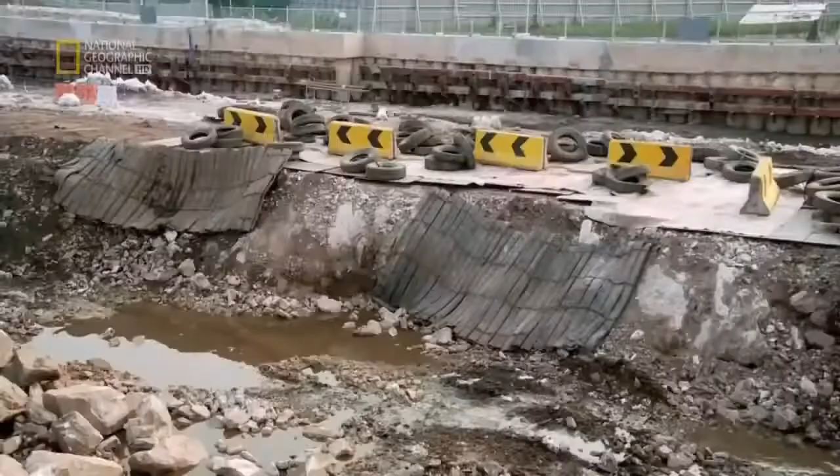Now there's an ambitious solution: a new transit system that will crisscross not only the city, but the entire region of Greater Kuala Lumpur. Huge machines will bore into Kuala Lumpur's treacherous bedrock to carve out almost 10 kilometers of tunnel. Every day of construction, engineers confront the perils of mechanical failure, fire, and collapse. Get it wrong and billions of dollars of investment could go to waste, and the streets of Kuala Lumpur and its pent-up economy will stay trapped in gridlock.

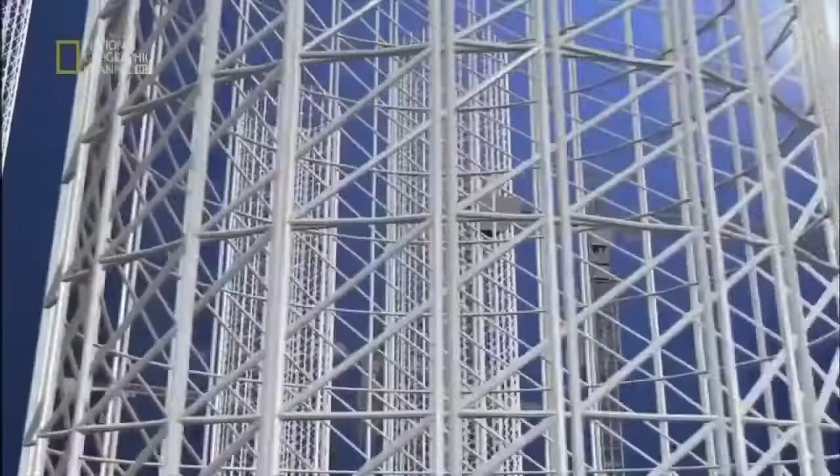Kuala Lumpur is one of Asia's most vibrant cities. It's looking to compete with the region's Asian tiger economies. Its magnificent skyline testifies to its soaring ambition. But at street level, it's a different story. The city is blighted by severe congestion that threatens its future growth.

Over 7 million people live and work in the Kuala Lumpur region, the Klang Valley. Every day, they head into town in 4 million cars. As an alternative, a light rail transit system was built. But over time, it has been overwhelmed, and connections are inadequate.

Now there's a solution: a new mass rapid transit system that will reduce the pressure on traffic and unite far-flung parts of the city. For any modern metropolis to be vibrant, to be competitive, to be on par with some of the leading cities in the world, you've got to have a modern public transport system.

The Klang Valley Mass Rapid Transit System, the KVMRT, is Kuala Lumpur's bid for greatness. Three different routes comprising more than 150 kilometers of brand new lines. It will be seamless travel around the Klang Valley, especially the areas of high concentration population.

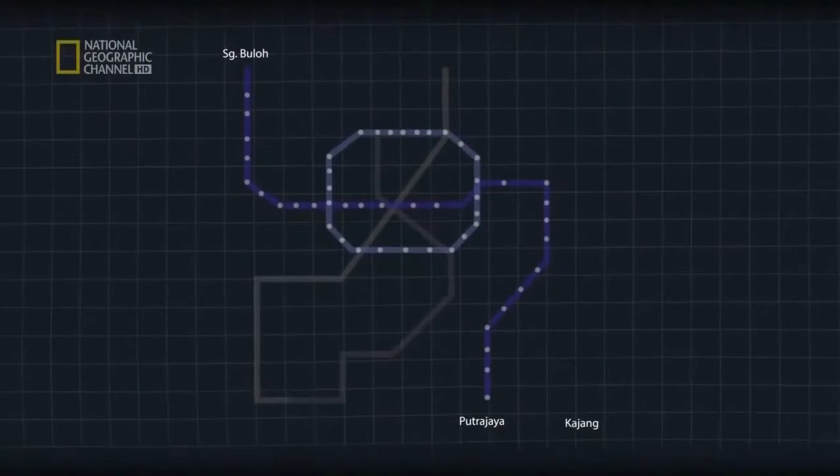The first stage of the plan is the biggest test of all. This is the Sungai Buloh Kajang line. It will stretch 51 kilometers with 31 new stations. A fifth of the new line will have to be constructed underground. To do this, 10 giant tunnel boring machines, or TBMs, will be brought to Kuala Lumpur and set to work.

These mighty engines do much more than burrow through rock, astonishing though that process is. As the huge drill crunches forward, the back end constructs the tough tunnel frame with high-strength concrete.

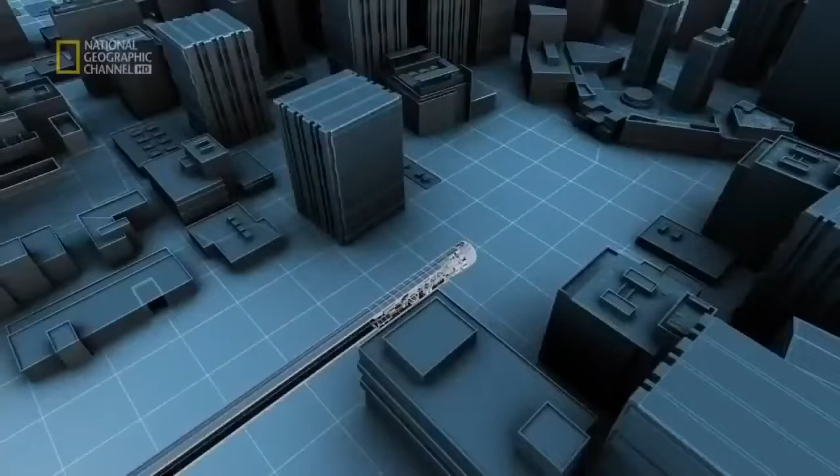In charge of this massive operation is engineering veteran Satpal Bogal. Most cities now, for railway mass transit systems, build tunnels using TBMs because of safety issues and because of ground conditions. The underground section of the new MRT will be a perilous undertaking.

For beneath Kuala Lumpur is a formidable engineering challenge. Below the city are two very different kinds of rock, and the TBMs will have to deal with both. The western area is known as Kenny Hill, and the eastern area as the Kuala Lumpur limestone. Imagine the difference between a Dutch Edam and a Swiss cheese riddled with holes.

Dr. Uilian Hock is the project geologist and expert on Kuala Lumpur's underground world. I got this Dutch Edam cheese here. As you can see, this whole piece of cheese is fairly homogeneous, very tight. And Kenny Hill, when it's bedded, looks something like this. This is like the KL limestone. All right, this is Swiss cheese.

As you can see, there are a lot of cavities and voids inside the cheese. These voids can be transmitted all the way to the other side of the cheese. Things can move in from one hole to another hole, and it may come in vertically and go out laterally.

The most formidable challenge lies beneath the eastern areas of Kuala Lumpur, which rest on a huge slab of limestone. Over millions of years, torrents of acidic rainwater have eaten away the layers of rock to sculpt a hidden landscape of pinnacles, cavities, interconnected passageways, and colossal caves.

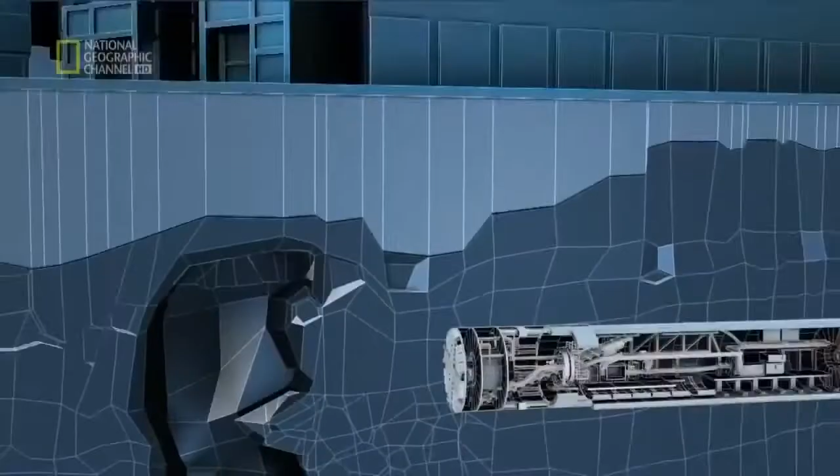Around me here on my left is a surface karst, or a limestone hill, you can say. Now imagine when we are underground and all these are covered with soil, it is totally a different ball game. So when you tunnel through this kind of material, there are a lot of unforeseen circumstances which would be a nightmare for tunneling. This is the worst nightmare of all.

The drill head hits weak cavities and the rock caves in on the cutter head. The solution is this stuff: slurry. At the head of the drill is a high-pressure chamber that injects a liquid called bentonite slurry into the cavities before they can collapse.

This ingenious system was used by the engineers who built the Smart Tunnel in Kuala Lumpur, the world's first combined storm and traffic tunnel. But builders learned some hard lessons about slurry.

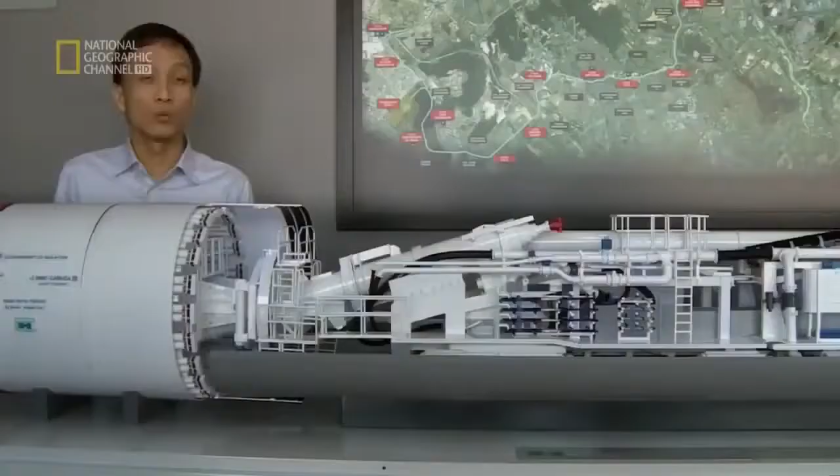Ng Hawei was a rookie engineer on this project. We have the best machines in the world in the SMART project, but we still do have some problems. We just couldn't control the slurry and it easily escapes to the surface, creating sinkholes.

What Ng and the engineering team found, to their cost, was that the slurry they injected into the limestone cavities could escape into surrounding rocks and cause havoc, bursting from the ground like a geyser or creating sinkholes at the surface that might suck in people, cars, or buildings.

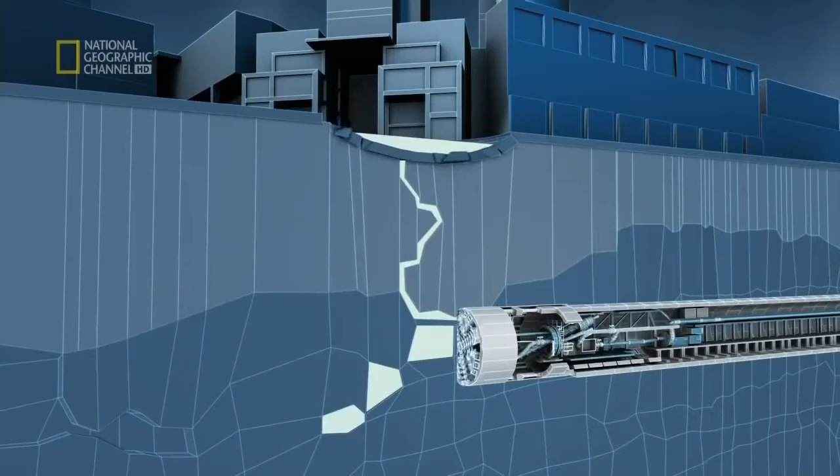Today, Ng heads the tunnel team building Kuala Lumpur's MRT system. And this time, he had to find a solution to the uncontrollable slurry problem.

Working with German company Herrenknecht, Ng and the team of engineers have come up with a revolutionary kind of machine. We throw in all the ideas, we have brainstorming sessions, we consult a lot of experts, we have to do a lot of research because no machine has been designed like this before.

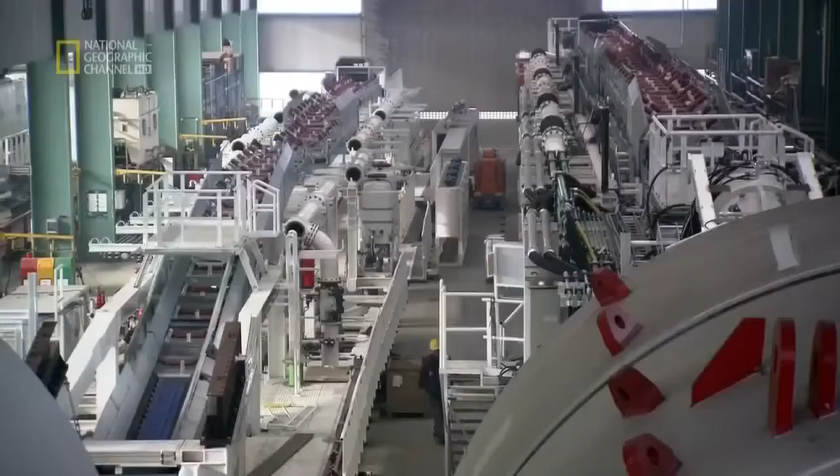From these brainstorming sessions was born this mighty machine. Called the Variable Density Machine, it's the state-of-the-art tunneler. For the first time, a TBM can control the consistency of the slurry and take on whatever Kuala Lumpur's underground throws at it. Even the construction of this revolutionary machine is on an epic scale.

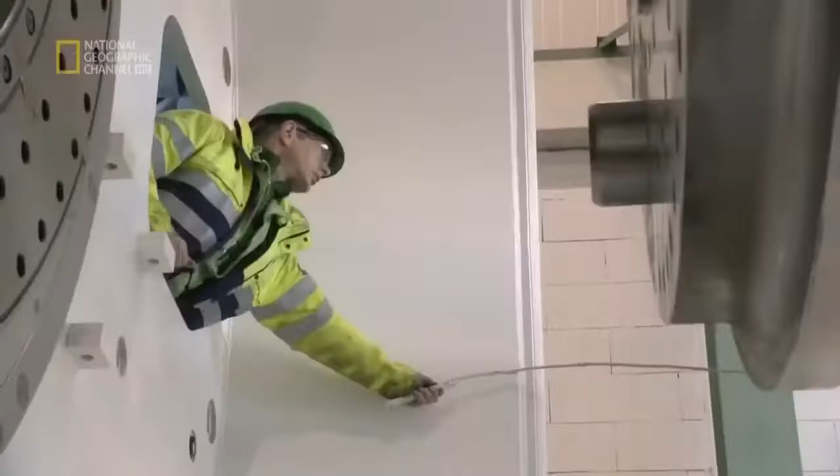Components are brought from all over Europe to be assembled inside the massive factory in Schwanau, Germany, and other Herrenknecht plants in China. You can say the machine is fitted together with about 40,000 pieces, one by one.

The design starts screw by screw, piece by piece, and this is brought together with all our 400 engineers. They do all these works to come to this level, what you can see today. It takes 9 months to manufacture the revolutionary TBM.

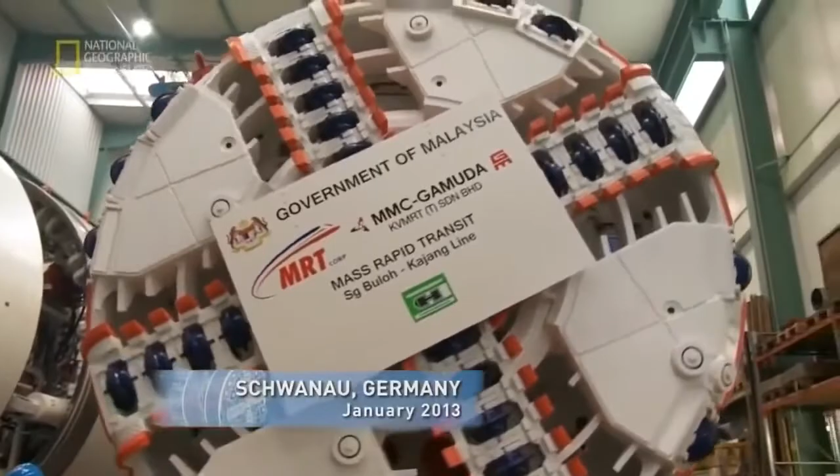Today, it's ready to be put through its paces. We have only seen it on the drawing board so far. So this is the first time that it is all put together. Everything is running, so we can check every equipment, including the cutter heads, the hydraulics, the safety features. This is the last chance for us to make final modifications before we send it to the site and put it in the ground.

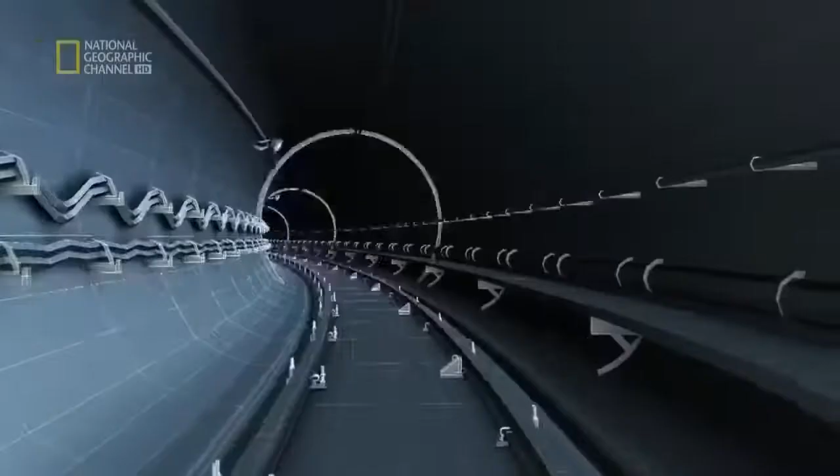As the engineers work on the TBMs in Germany, work gets underway in Kuala Lumpur. The engineering company in charge of tunneling, MMC Gamuda KVMRT, must complete the job in 24 months and with minimum disruption to the city above.

The operation is conceived on a military scale and with military precision. The TBMs will be launched from 4 different staging zones along the planned route of the underground section of the MRT. At the western end of the tunnel, the elevated section of the MRT begins its descent underground from the surface. But at the 3 other zones, shafts must be excavated so that the different TBMs can be put to work beneath the city. Eventually, the different sections of the 9.5-kilometer tunnel must all link together.

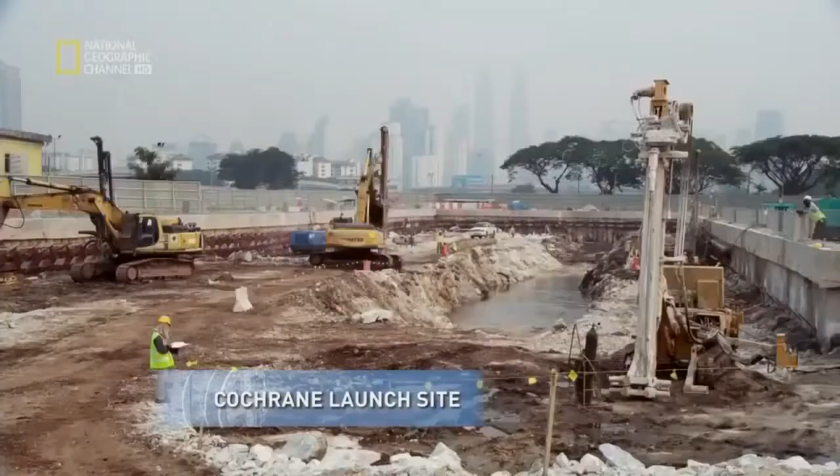Since July 2011, work on Kuala Lumpur's new MRT starts here at the Cochrane site. It must be dug out to a depth of 30 meters before 4 TBMs can be deployed. The huge staging zones will be blasted out of the ground.

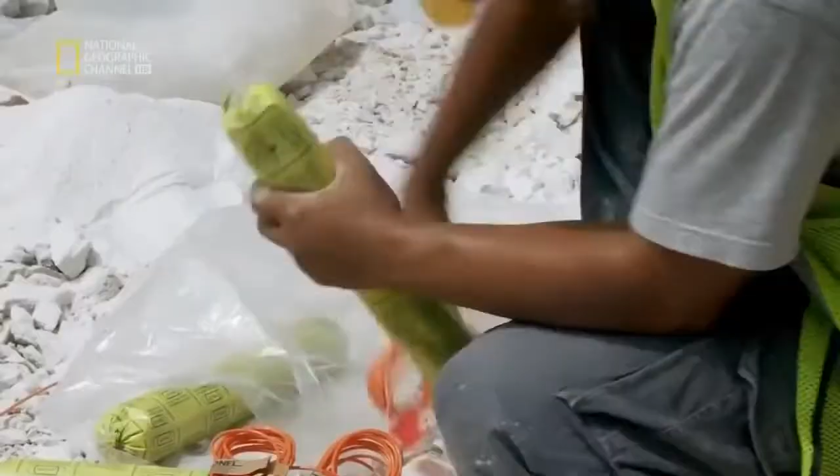We have short time to meet our requirements, so we are working with frequent blasts, more than 2 or 3 blasts a day. The blasting must be carried out with rigorous precision, especially in a city as dense as Kuala Lumpur. So when you talk about blasting itself, it's dangerous.

You can see we've been surrounded by high-rise buildings. Now at the moment you're using about 150 to 200 kg, so that can bring a 10-story building down. The solution is to sequence each blast, creating a pressure wave that in theory won't damage surrounding buildings.

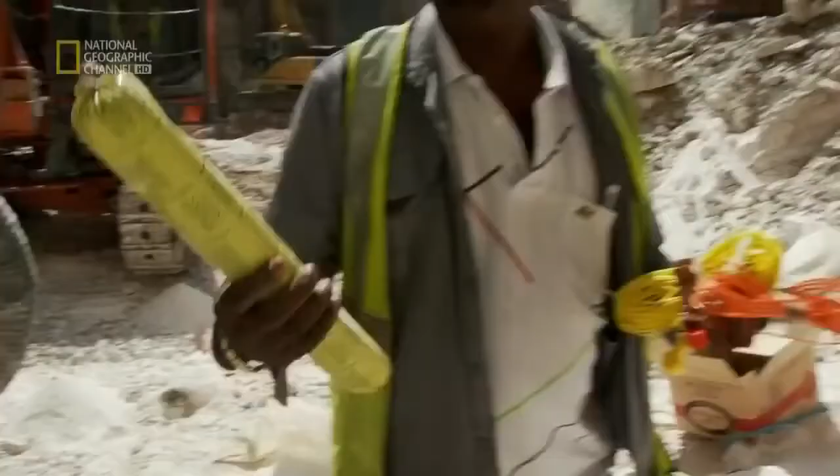These are the basic things we use. My hand now is explosive, which will be charged to the detonators over here, and it will be connected one at a time, and finally we have delays. This will segregate the blasting rather than at one go.

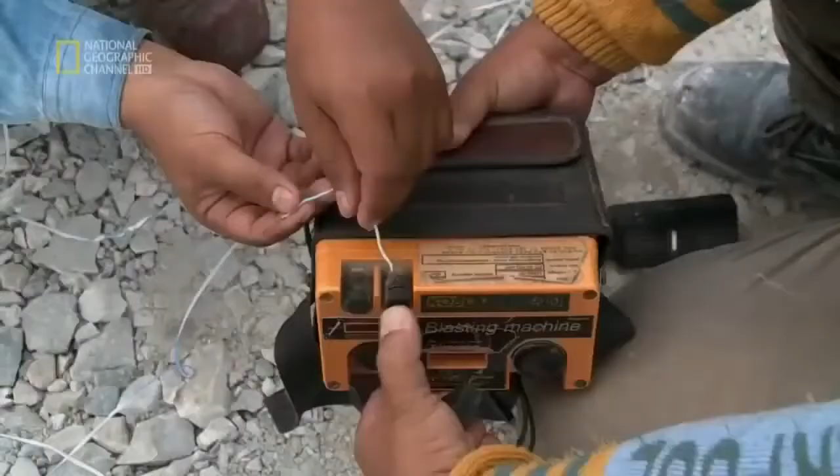Engineers dig rows of holes between 3 to 6 meters deep. Then the explosive charge is inserted inside with a detonator. These are connected to a central command point. But nothing is left to chance. Giant barriers of steel plates, truck tires, and concrete prevent debris flying from the site. The charge is set.

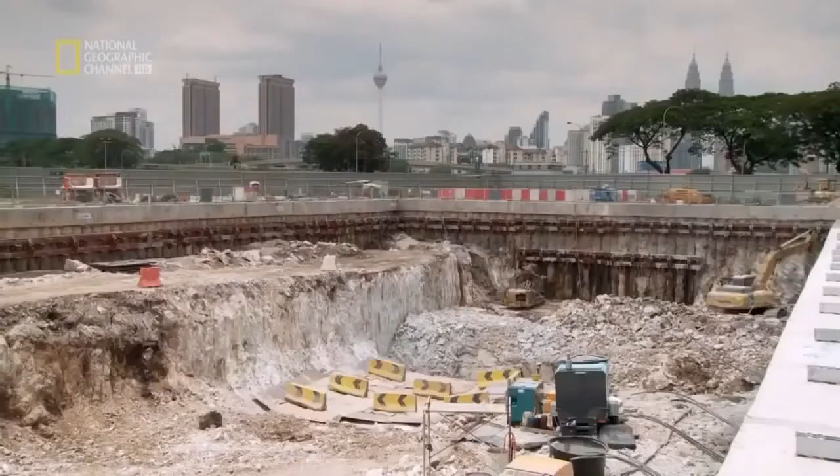The engineers have got the right formula, and the surrounding buildings are safe. The blasting continues at the Cochrane site for seven explosive months. Enough rock and soil to fill 50 Olympic-sized swimming pools is blown out of the ground.

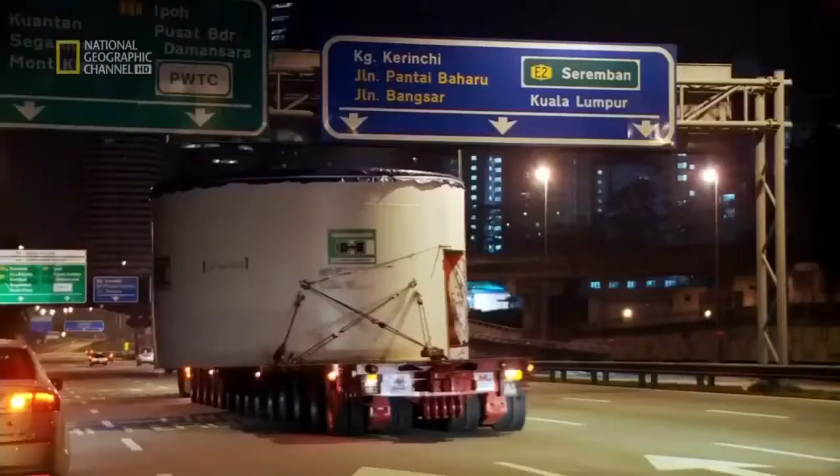Finally, the site is ready to receive the first TBM, code name 774. At the beginning of 2013, the first new model arrives in Kuala Lumpur. The giant machine is transported in parts to the Cochrane site on huge lorries.

But that's the simple part. Now the 160-ton monster must be lowered into the excavated shaft so that they can start chewing into bedrock. To lift it 30 meters down the shaft, we have to be very careful. Anything can go wrong and then we are stuck. It will push back the whole project completion by a lot.

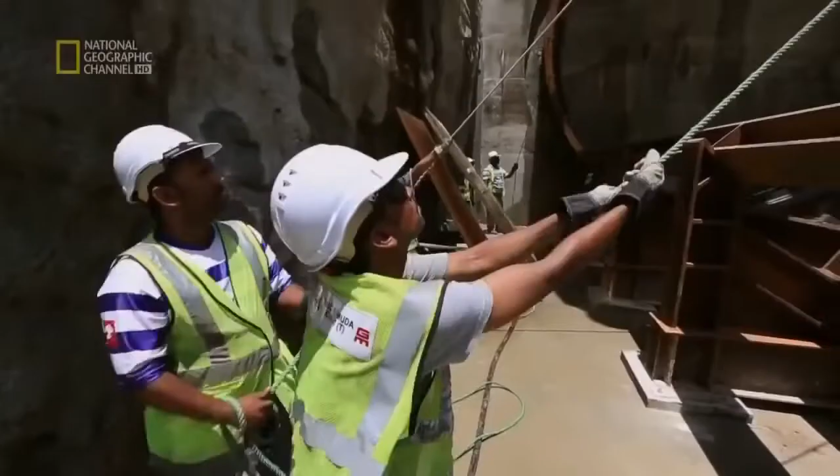At the site, everyone is holding their breath as the TBM begins its descent underground. Malaysia's capital, Kuala Lumpur, is being transformed into a huge building site. A new MRT system is under construction. Close to 10 kilometers will be built beneath the city, and a revolutionary new tunnel boring machine, or TBM, is

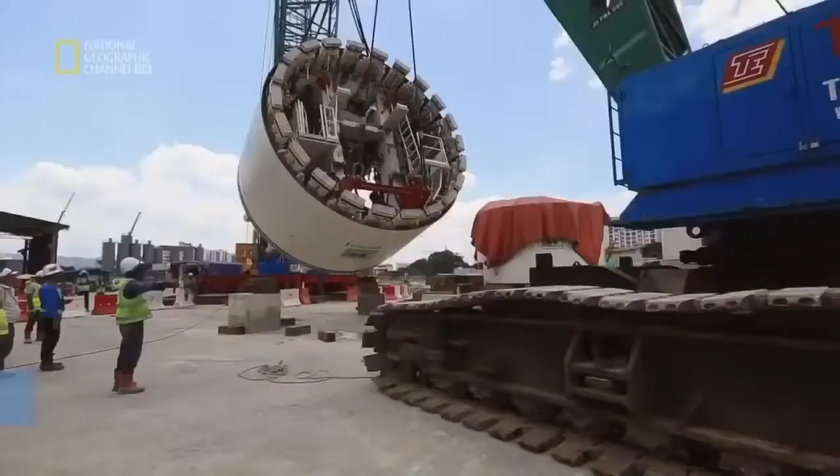brought from Germany. The first to be sent into action weighs 160 tons and has to be delicately lowered 30 meters to the tunnel entrance.

The man in charge of the tunnel operation is Ng Hao Wei. He won his spurs building Kuala Lumpur's famous Smart Tunnel. We are dealing with very delicate components. We cannot afford to damage it. If the extent of damage is huge, then the impact to the project will be tremendous.

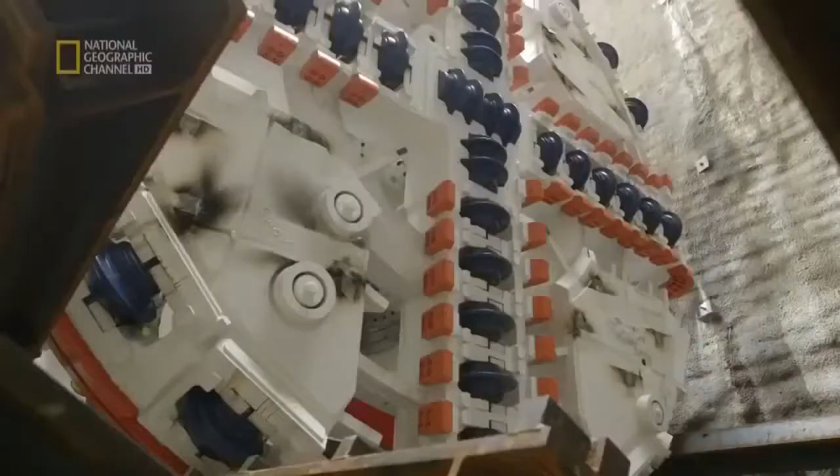This is literally the cutting edge, the business end of the huge machine. The circular cutter head weighs 70 tons with 37 tungsten carbide cutting discs, which are stiffer than steel and denser than titanium. The entire TBM is 135 meters long, almost double the length of a 747 jet airliner.

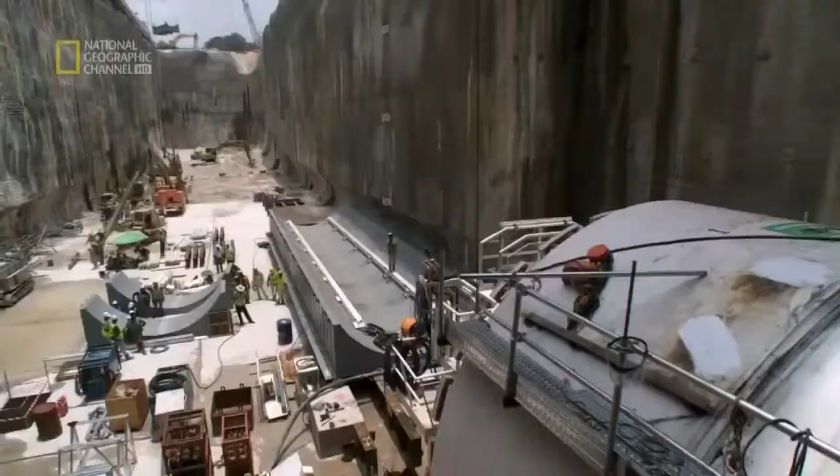Each TBM has 10 interconnected gantries to support the operation. Only three-quarters of the shaft has so far been excavated, so the monster machine has to be assembled in sections. We assemble up to the 6th gantry, which will give us the key components of hydraulics and electrics, so we can start to launch the machine, at the same time give sufficient space for the shaft excavation to go on. It takes just under 3 months for the TBM to be assembled.

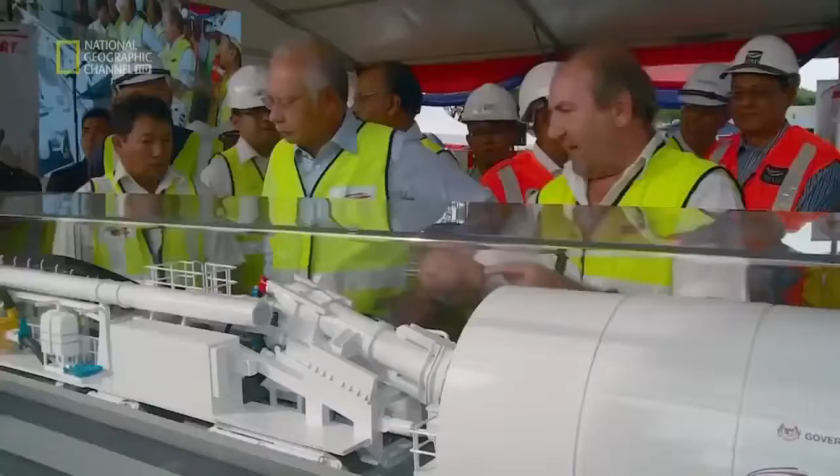The Prime Minister of Malaysia launches the very first variable density TBM. It's actually a technological marvel. And it goes to show that, in partnership with a German company, Malaysians can offer a lot of our technical guidance and advice. This is something that we can be really proud of.

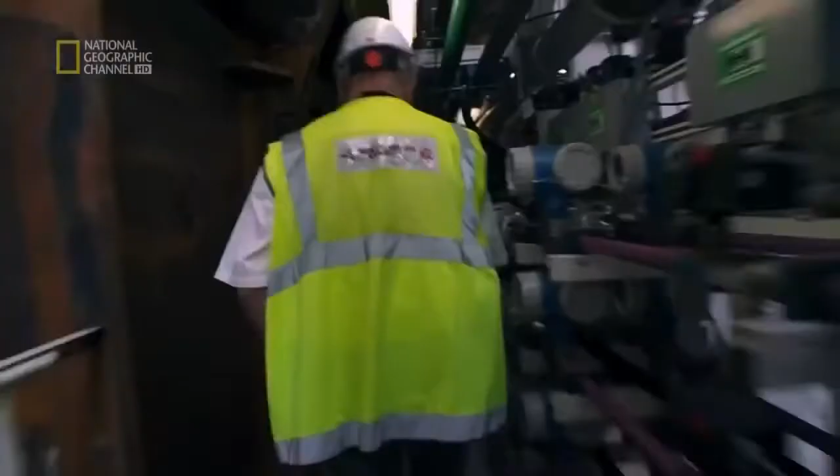One day later, Ng Hao Wei and his mentor Gustav Klados arrive to check on the machine's progress. Gus, a veteran Hungarian tunneler, has worked on some of the biggest tunneling projects in the world, including the Channel Tunnel linking Britain and France, and the Smart Tunnel here in Kuala Lumpur. This tunnel warrior is the team's project manager and is thrilled to be working back in the city on the new machine.

It's uncharted territory. We are trying out something totally new. A lot of people at the beginning said no, it won't work, but now it is excavating. You can hear the stones moving around in the pipe, so it's a fantastic noise. It's my favorite, much better than in the office.

It's not just the machines that will need breaking in. The giant TBMs must be served by an army of workers, day and night, week after week, month after month.

I'm new here, but I try to make my best every day. Everybody starts as new, trust me. I did start as a new guy too. My first job was to go and count the number of nails and bolts and nuts in the stores. I went there and literally counted them for a week. When I finished, I went to the storekeeper and he told me that we usually use a scale.

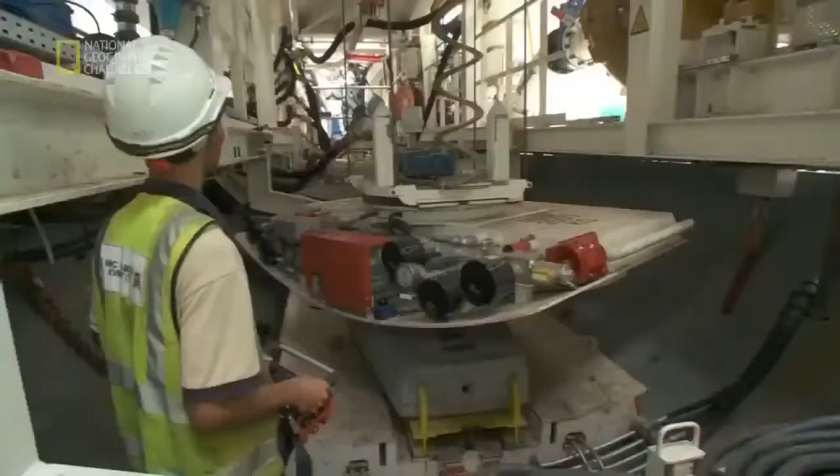The MRT tunneling project will need thousands of workers over the two-year period of construction, and MMC Gamuda set up an academy to train the hundreds of workers needed to finish the tunnel on time.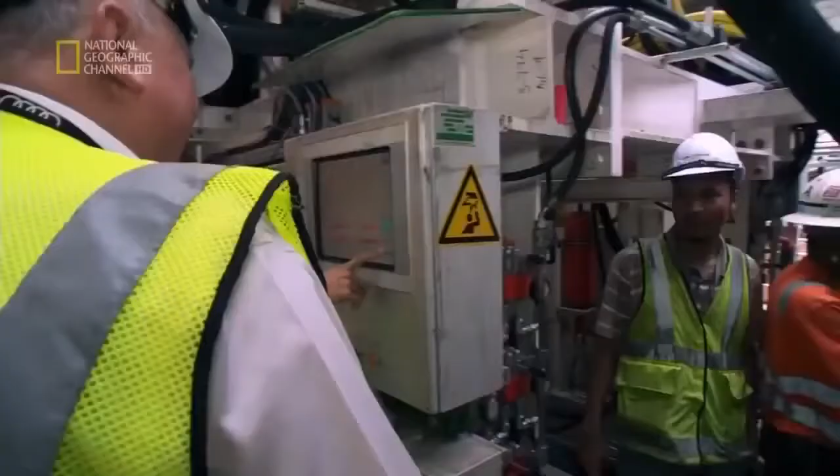Veteran or newcomer, the team faces a daily avalanche of problems, and right now, the problem is pretty basic. The TBM is just not picking up speed. 8 millimeters a minute, not very fast. Yeah, but it's all right.

At this pace of tunneling, the project will take 4 years longer than expected and run millions of dollars over budget.

But veteran engineer Gus Klados hopes that the giant machine will soon pick up speed. In the next few months, it is just to sort of break in the machine like a horse which has never been ridden before. And I am convinced that we will make it work.

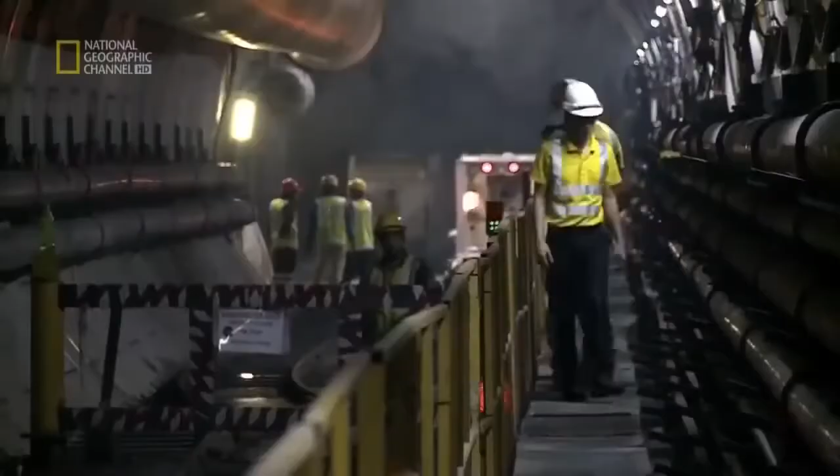The team is under pressure to complete the tunneling works on time. In the tunnels, the TBMs never stop mining. It's a 24-hour operation. And 3 weeks since mining began, the giant machine has at last picked up speed.

The TBM is like a huge underground factory, drilling, building, and spewing out waste. The heart of the entire operation is in this tiny space.

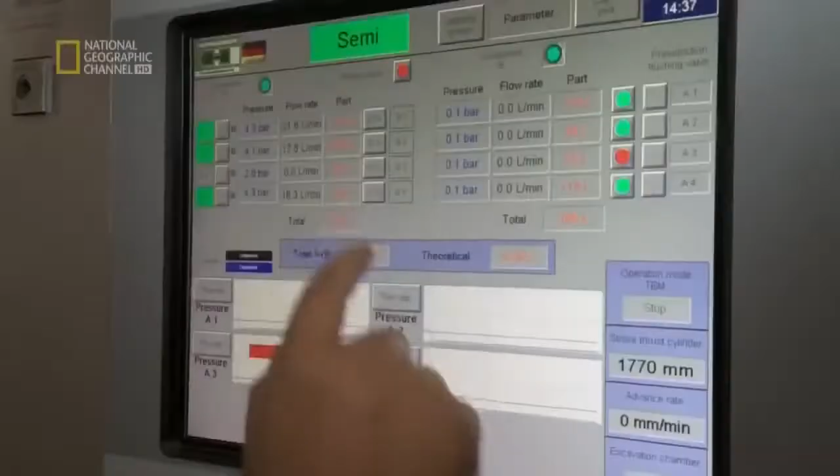So what's happening? Pressure sensor number 4 has a broken wire. Control cabin means the heart, the control center of the TBM where everything is controlled.

If you're building a skyscraper, visibility is not normally a problem. But underground, it's a different story. You can't see through rock. So to give the TBM underground eyes, the machine is equipped with arrays of sophisticated sensors. It's like when you are working in a submarine. You have to depend on the sensors, you have to depend on communications, you have to depend on eyes. Other than yourself, you can't see anything.

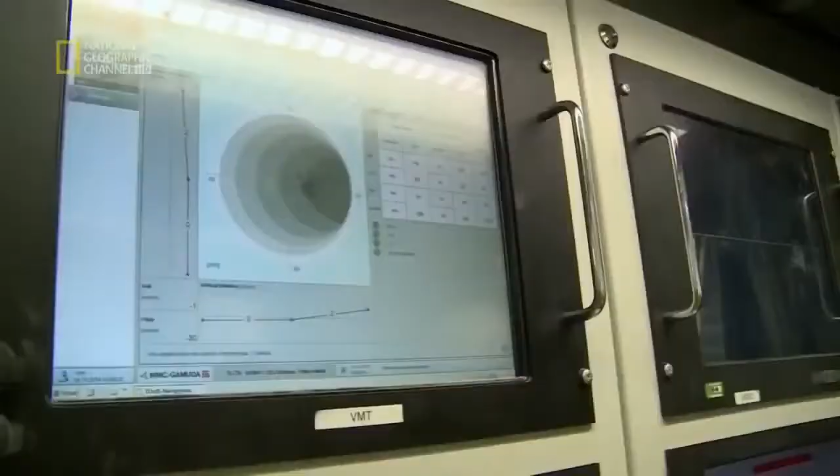Inside the control cabin, engineers can work out with absolute precision the real-time position of the TBM, calculate changes of direction, and when to start lining the tunnel wall. After mining about 1.4 meters, we build the segments piece by piece and then build them up like a jigsaw puzzle. These tunnel rings are made from 7 segments plus 1 keystone that holds everything together.

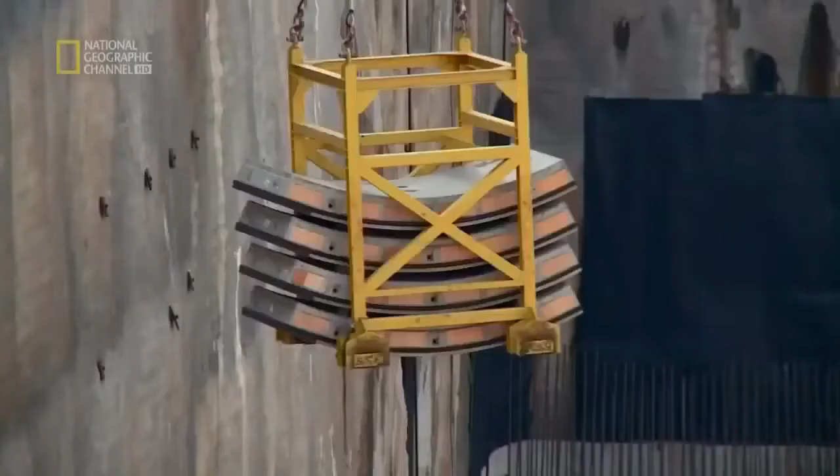The concrete wall segments can withstand extreme pressure 30 meters underground. All day long, concrete segments arrive at the TBM. Each segment weighs 2.2 metric tons.

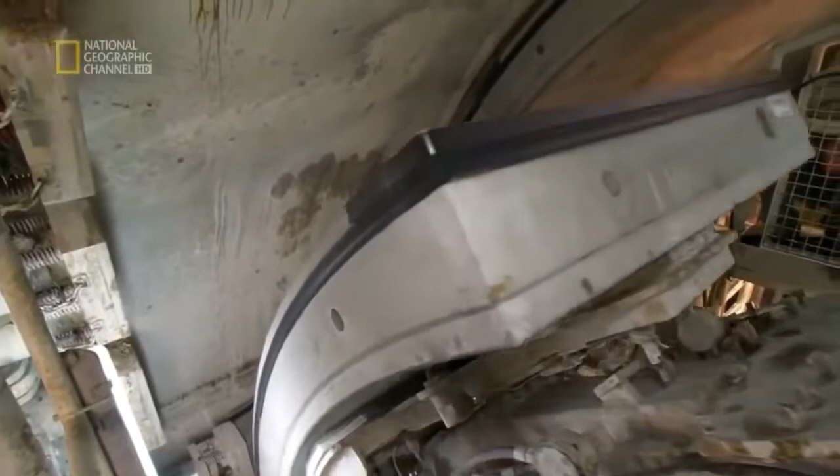Giant hydraulic arms swing the segments into place using the TBM's vacuum erector, which uses the power of suction to raise and position each segment. Precision is essential. If any one of these segments are wrongly positioned, the consequences would be catastrophic.

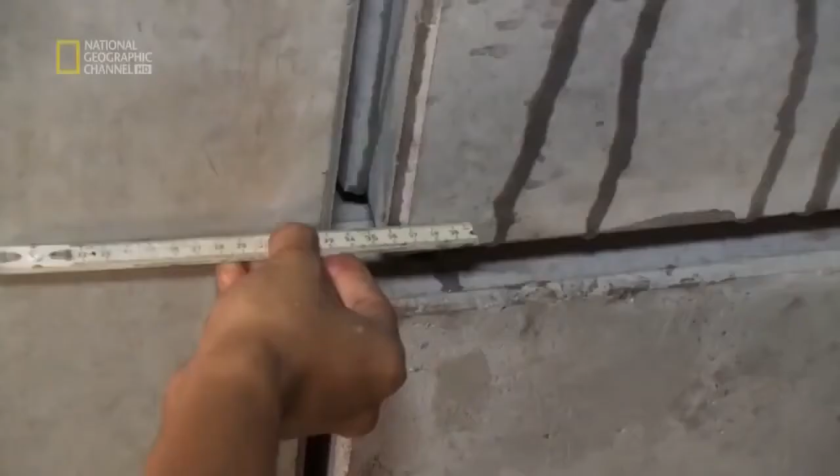So it's very important to drum into the ring building team that they have to build it to the required tolerance of a few millimeters precision. If we are out from tolerance, the water will find its way to seep through and we'll have a great problem to seal it up.

Over time, as graduates of the Tunnel Training Academy get more experience, the process builds up momentum. In the first week, the teams managed to place just 3 rings a day. 3 months in, and the rate is 5 times higher.

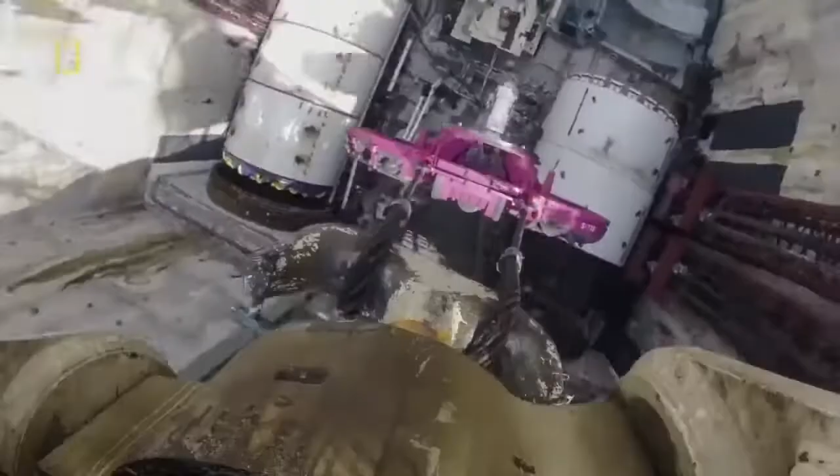The campaign to excavate Kuala Lumpur's new MRT tunnels is about to enter a more intense phase. By November 2013, 4 TBMs have been successfully launched from the Cochrane site. But at another launch site near Inai Road, the engineers have run into difficulties.

Here, 2 circular shafts are being excavated to 30 and 45 meters in depth. But as the shafts are blasted out of the ground, disaster strikes.

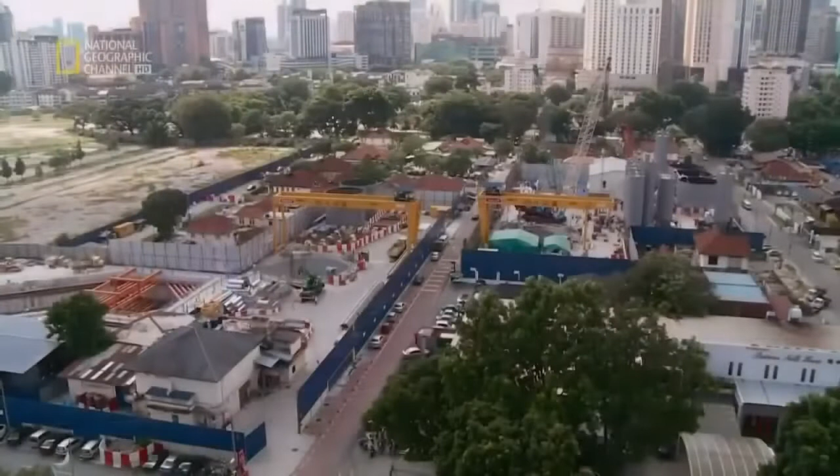The hole in the garden is frightening enough, but the condition of Mr. Jamal's home is even more alarming. Floors dip and cracks ripple up walls and across ceilings. The family home is falling apart.

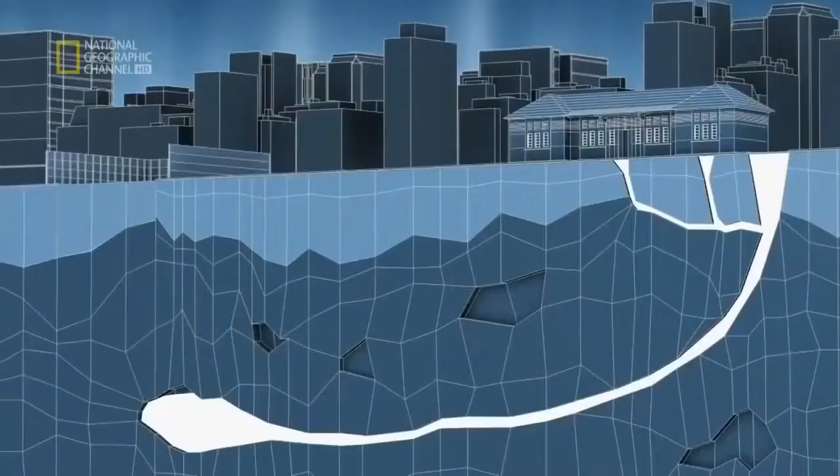In limestone, what happens is that the solution features can be connected laterally and vertically. What happened is we drill a shaft, and this hits a connection. When there's a hole, it's like a pipe culvert. If you have a culvert connecting from the shaft to underneath Mr. Jamal's house, that forms a very easy flow passage of water, bringing the soil from underneath Jamal's house into the shaft. And that results in sinkholes.

And it's not only Mr. Jamal's house that's in danger. Water is pouring in from the walls in the deeper of the 2 Inai shafts.

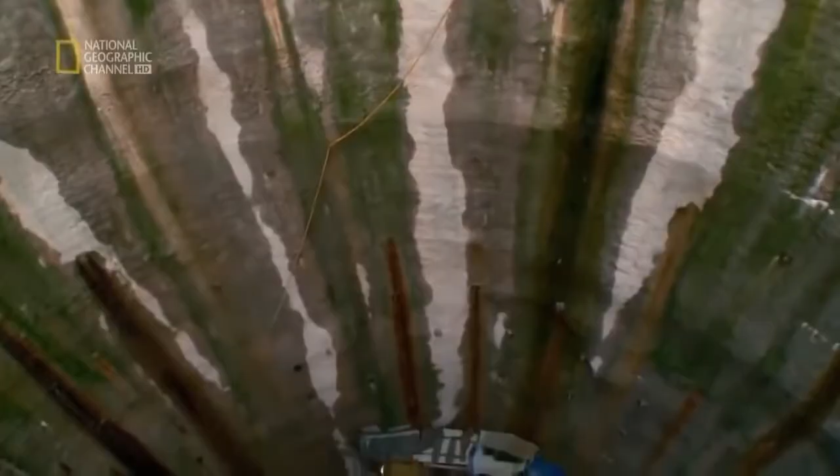It's unstoppable, and the situation is a tough call for project director Satpal Bogal. We couldn't stem it, and the decision was taken to backfill it for safety. That decision then followed on to other changes to the program.

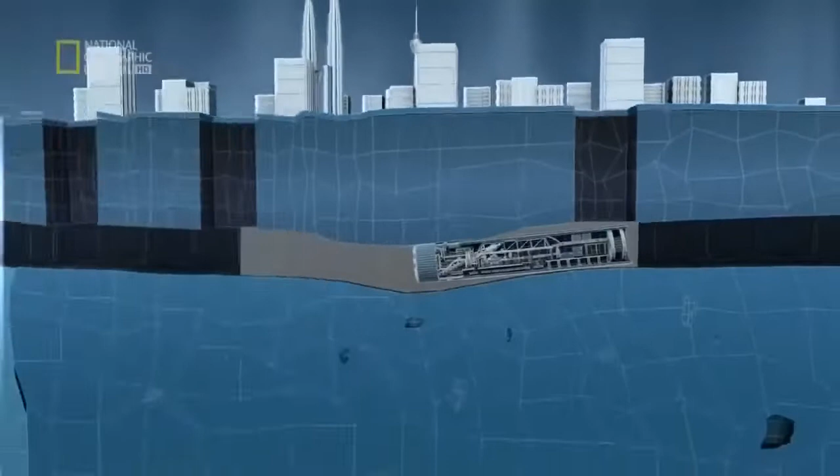Abandoning one of the two Inai shafts is a huge setback. Now only one TBM can be launched from here, meaning a new strategy has to be devised. The first TBM brought to Malaysia, 774, which has been mining from the Cochrane site, must now make up the difference and tunnel more than twice the distance. It will put the complex machine under severe strain.

It's not only flooding that makes the Inai launch site such a headache for the engineers, it's a very tight fit compared to the other launch sites. Tunnel engineer Aslan Marzuki is in charge of getting the huge TBM to the bottom of the shaft. It's a smaller shaft, it's not a square, it's a circle. That saves space, but that means our launching is going to be staggered.

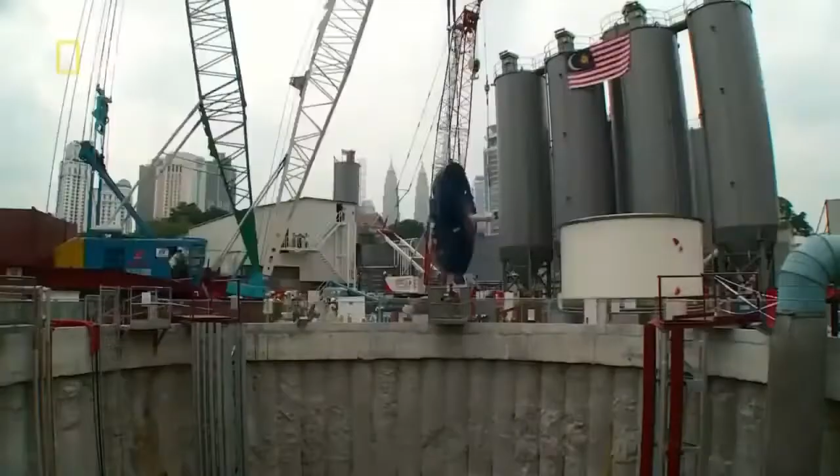The team will blast out tunnels on both sides of the shaft. Then the front section of the TBM is inserted. Next, three out of the ten gantries will be lowered one by one, followed by the giant screw. The problem is that the 18-meter screw segment is longer than the width of the shaft.

Behind me, this is our biggest component that's going to be lowered down. It's the most difficult one because this length is actually bigger than the shaft itself. The solution is simple, but risky.

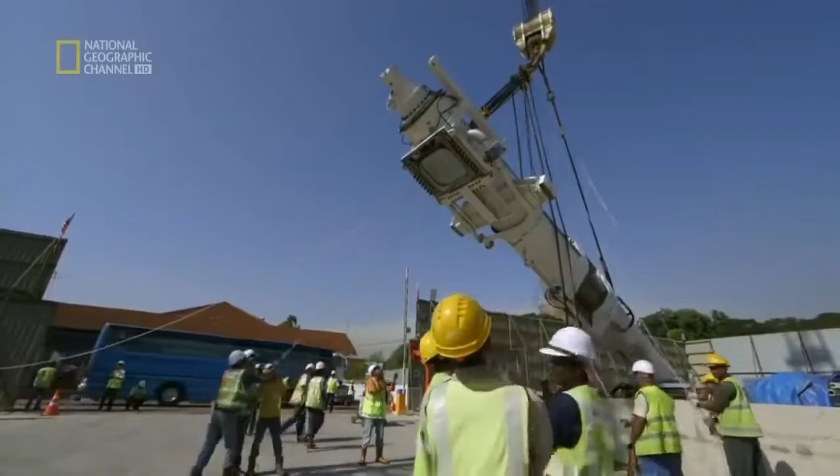The screw segment of the TBM will have to be lowered into the shaft at an angle. We have to tilt the screw conveyor at a 56 degree angle. You have to use a chain block, a hand winch, to pull the machine upwards. It sounds simple, but that giant screw weighs a whopping 15 tons, and any deviation from that critical angle would be catastrophic.

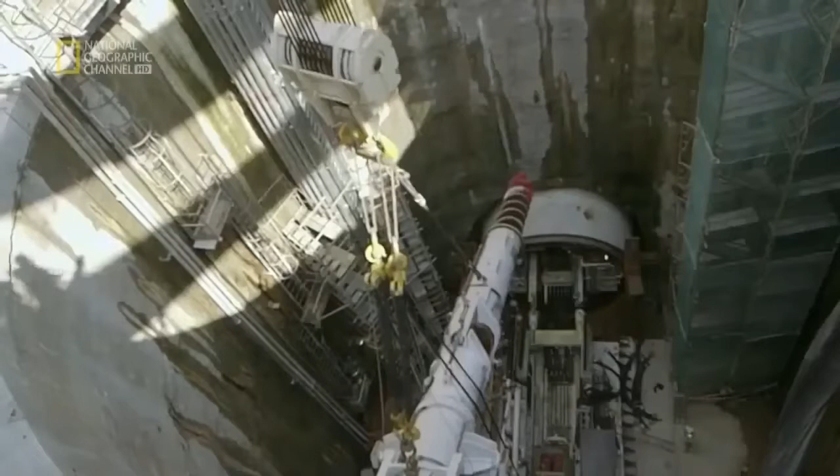At the bottom of the shaft, the engineers face another challenge. The angle of descent has to be lowered. It's another fiddly maneuver with a lot of complicated machinery at stake. When you lower it down, the final angle is 15 degrees. Down there, you still have to do the same exercise again, but it has to be a slow process.

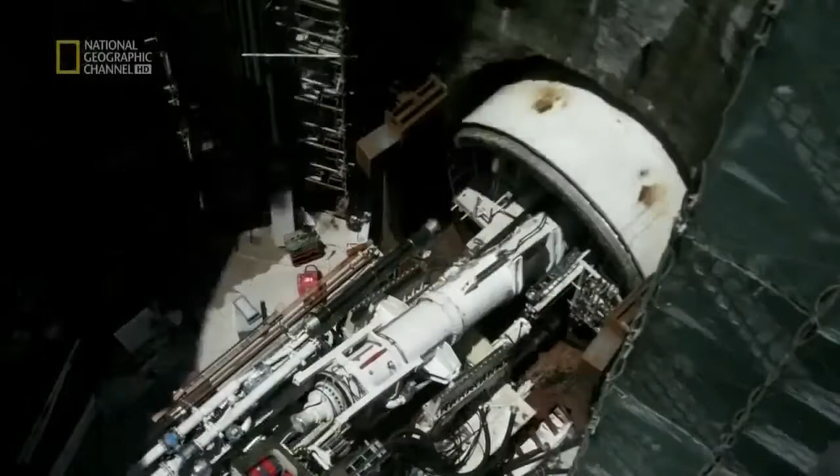After two hours, the screw conveyor is finally in place. It takes three months of hard slog to put the TBM together, but at last it can begin burrowing into the limestone. This underworld is packed with hidden dangers.

Like Swiss cheese, the rock is riddled with cavities that could wreck the multi-million-dollar boring machine. When you're tunneling this way and you have a cave directly underneath your cutter, and it's big enough that you cannot develop a face support, the thing just dips inside. In that situation, we are snookered. It will take us months to recover or to bring that TBM cutter face into operations again.

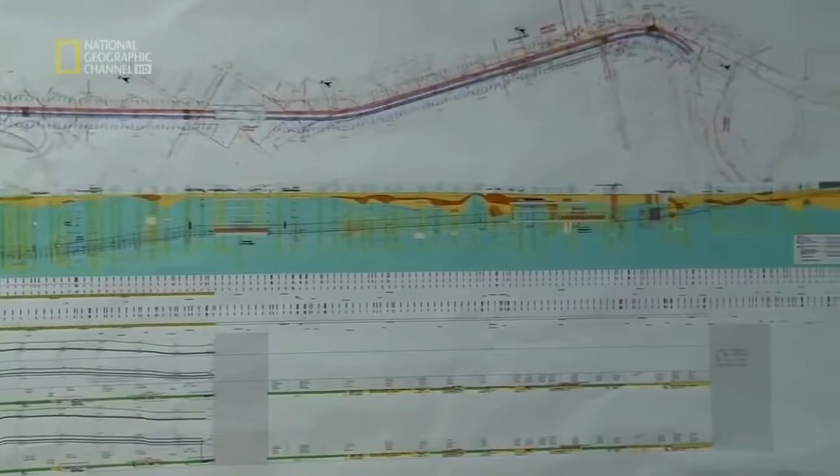As the huge drill edges forward at 14 meters a day, an army of engineers is busy scouting the perils that lie ahead. They drill hundreds of boreholes into the layers of rock. Once a cavity is detected, concrete is poured into the hole to shore it up. It's a process called grouting.

If we do encounter such a thing, then we'll do a lot of compaction grouting to fill up this void, like you go to a dentist to fill up your cavity, to ensure that when we are tunneling through, the TBM can go through safely.

But some cavities can be less than a meter wide. These are much harder to fill, but still pose a threat. There's no way we can pick it up. We are unable to treat all these features along our tunnel alignment. So what we then need is a machine that can cater for all these little challenges.

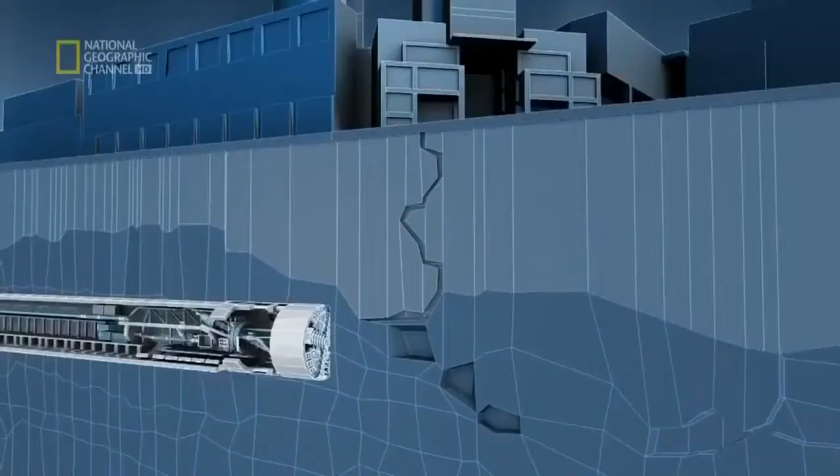Enter the new breed of tunnel boring machines. Behind the drill, a sealed high-pressure chamber is pumped full of liquid called bentonite slurry. Unlike previous models, the new TBMs can control the density of this thick gray liquid, changing the consistency from a thin watery liquid to a thicker honey-like substance. The thicker slurry is used to fill these hidden cavities, and its density prevents it from escaping through the porous rock to the surface.

The machine is able to operate at different modes at the flip of a button or some switches. So in situations where we have major loss of slurry, we can switch to a thicker density - it's kind of a paste that chokes up the loss, and then we can mine through very easily.

The revolutionary new tunneling system soon proves to be a success. But there is a problem that all tunnel engineers fear at the back of their minds.

Fire, every tunneler's nightmare. For engineers excavating Kuala Lumpur's new MRT system, the most terrifying scenario is a fire in the tunnel. A blaze can suck oxygen from the air in seconds. Workers can suffocate with terrifying speed, and the tunnel itself works like an oven, insulating the environment and ramping up temperatures to deadly levels.

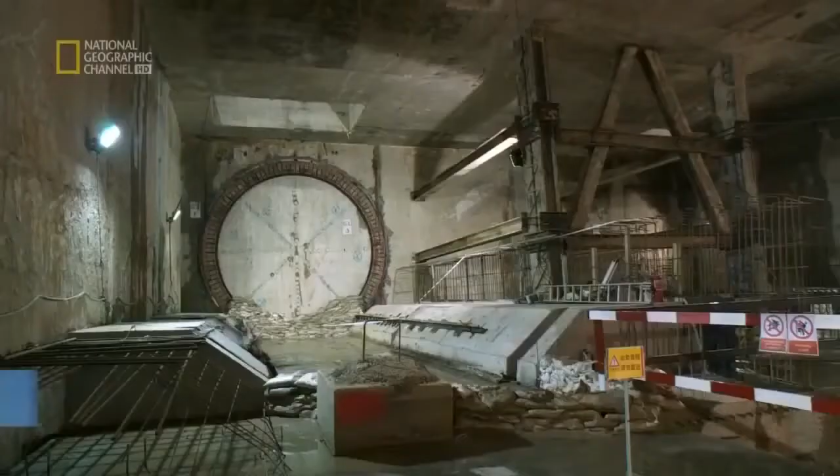Christmas Eve 2013, and the MRT engineers have cause to celebrate. One section of the tunnel, where the MRT line dives underground at Semantan to the Museum Negara station, has been completed. It's the project's first breakthrough, and at any moment the TBM drill head will emerge from this tunnel.

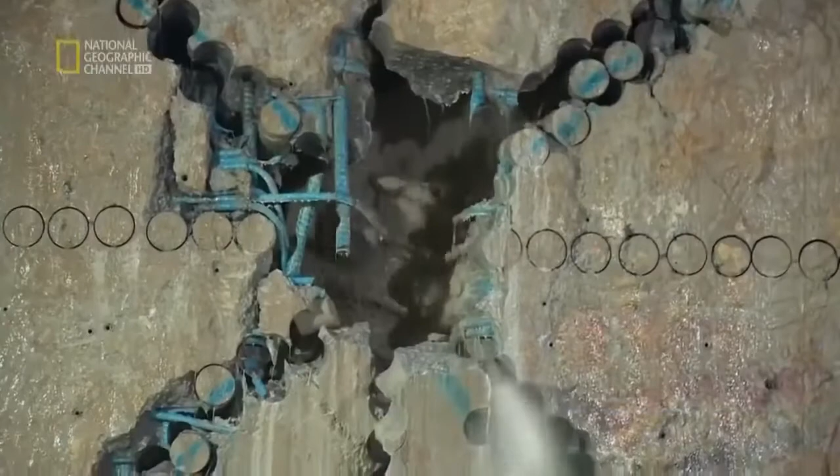It's an anxious wait for tunnel manager Chin Raymond. I told him if it doesn't come in the middle, it has to jump off a cliff somewhere. After drilling for 6 months, the TBM punches through right on target.

Congratulations. Thank you. Well done, man. Okay, good, yes, great - finally, I pushed my machine, and it came in.

I've been working for more than 24 hours. I can have a good rest to enjoy my Christmas.

But the machines don't get a holiday. As soon as the TBM completes its breakthrough, it is hauled into position to begin work on the tunnel that will link Museum Negara to the next station.

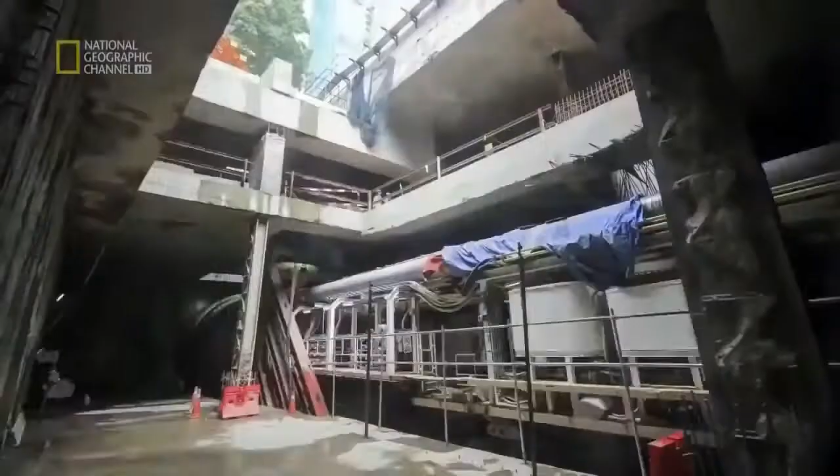The TBM is now burrowing beneath the historical heart of Kuala Lumpur. The Museum Negara is a repository of the nation's history and culture, its facade lined with precious mosaics.

Further along the path of the excavation is the old railway station, an icon of the past that stood the test of time. But can it withstand the mighty TBM as it threads its way nearby?

We were stuck with having to cross under some sensitive structures, and the ground settlement would affect the existing structures. If there's too much ground settlement, the buildings could collapse.

For the old building, we had to pay much more extra care because we don't know how good the structure is, or how good this building's foundation is. So we had to pay extra precaution on that.

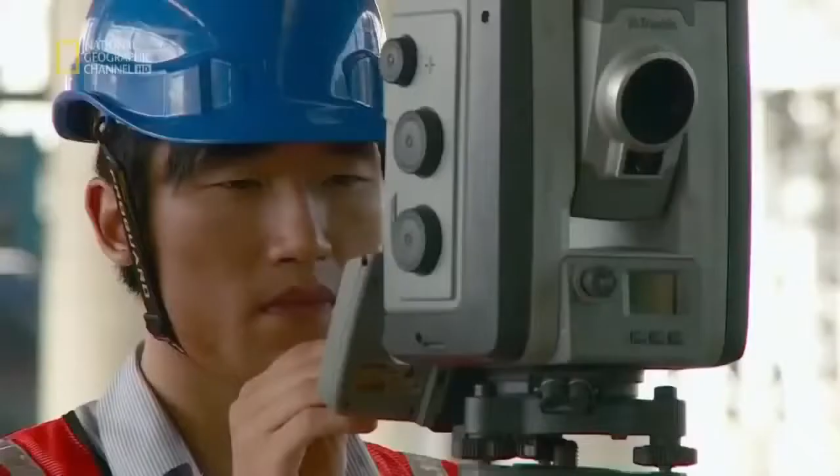A team of surveyors now equip these venerable buildings with highly sensitive sensors that monitor every vibration. As the TBM approaches, Tae Chi Yong and his team of surveyors nervously carry out hourly tests to monitor the old buildings. The TBM is directly below this building. We get to monitor the effects and impact of our TBM drive on the structures above, on the surface above. It's a nail-biting 5 months of constant monitoring as the TBMs negotiate this historic region. And at last, the TBMs inch past. The iconic buildings are safe.

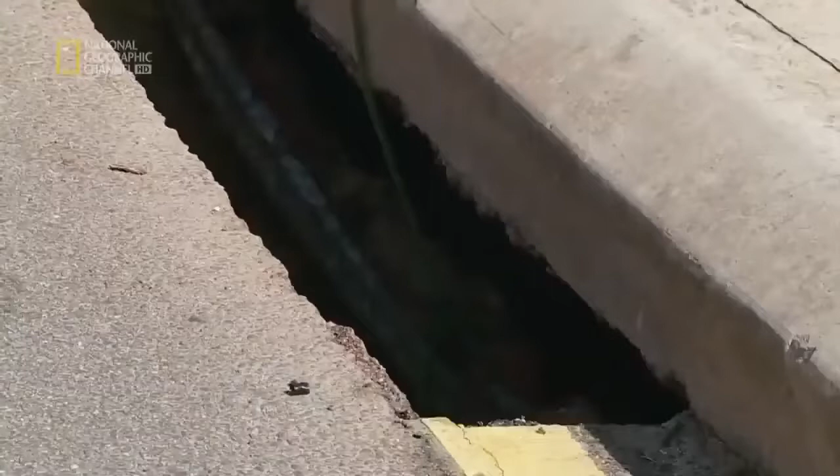While the people of Kuala Lumpur get used to living and working in a massive worksite, where giant boring machines gnaw away at the city's bedrock to build a new MRT, the President of the United States will be descending on Malaysia in 3 days' time.

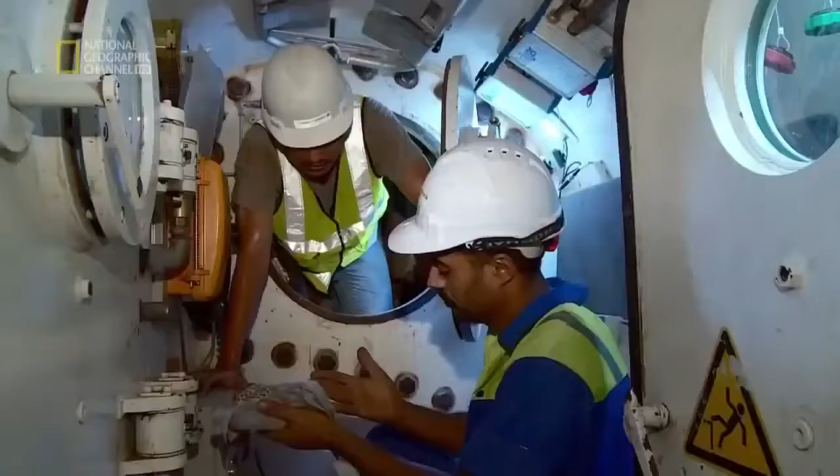But all is not well with TBM 774. Located less than 400 meters from Obama's planned accommodation, the TBM gets a bad case of indigestion and is unable to process the waste from the cutter head. It has come to a halt.

Directly above the TBM, a team is tasked with monitoring road surfaces to look for any signs of trouble. Called the Bull Gang, it is led by Michael Poon. We have a team of people patrolling 24 hours. We have to check on the surface. This morning I walked by, I saw some settlement. It's just a small depression. I can see the hole, it's quite deep. At the surface, the cracks don't seem to pose much of a threat.

But like icebergs, most of the danger is hidden. Down there is a void big enough to fit an electric car. We have an unscheduled stop. They have to lower all the slurry. That means the face support is affected, and that causes a depression or a sinkhole in front of the cutter face.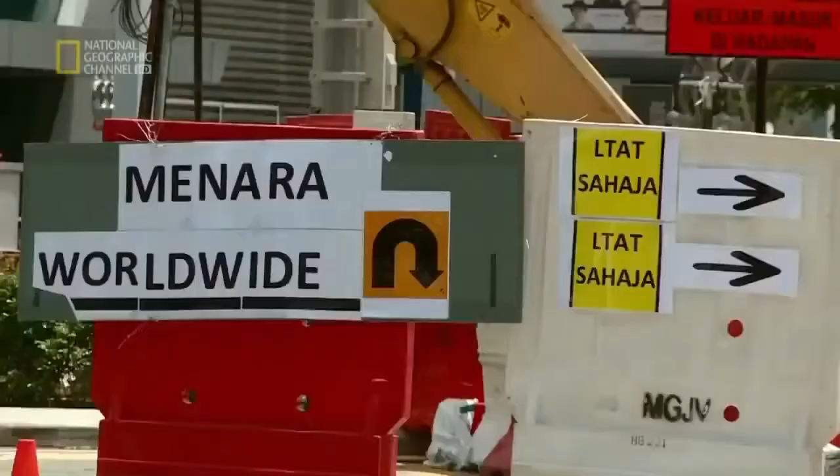An emergency response team reacts immediately. The road is closed to traffic. Then we decide to order mortar to fill up the hole. The hole is quickly filled with 5 cement trucks of concrete, and frantic repair works continue inside TBM 774.

Across town, there is reason to celebrate. The 5th breakthrough of the project will take place today. It's a landmark moment. It means that 50% of the tunnel has been completed.

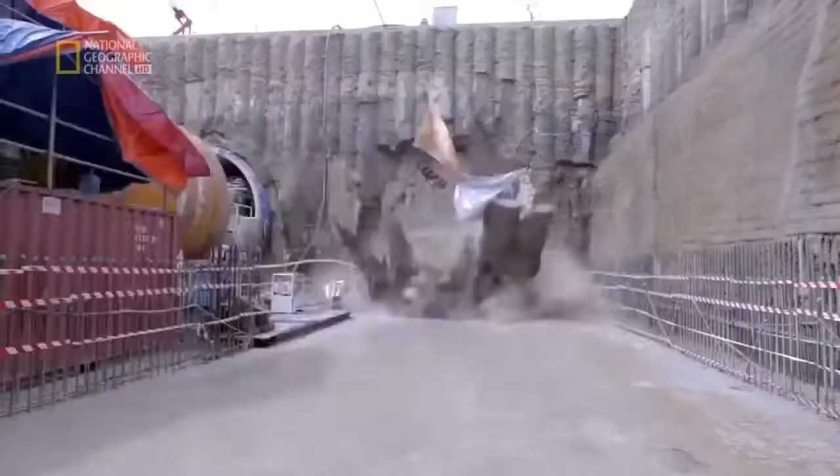Well, every breakthrough is like a landing on a plane, right? Once you're there, you feel great because you brought home the TBM. The breakthrough, I thought it was very exciting. Now we finished everything, it's very, very good. I'm very content with the progress as well. The quality of the tunnel linings that we have in the precast concrete inside is one of the best. We work as a team. We work night and day, blood and sweat, hard time, good time. This is the prize for all the crew. This is like a present.

But the celebrations are short-lived. As TBM 774 finally starts mining again, President Obama arrives in Kuala Lumpur. But to the horror of the team, another collapse occurs just meters away from the earlier sinkhole as the president is at the official state dinner.

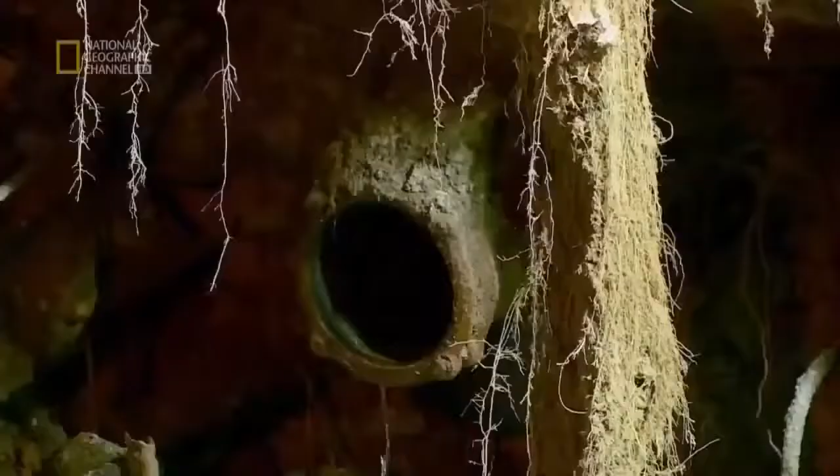This new sinkhole is an even bigger problem than the previous one. Ground movement has broken water pipes, and the hole is filled with live power cables.

President Obama is living nearby. We definitely do not want to cut off water and power to where Mr. Obama is living, obviously. So we're trying to get this done in the quickest time possible.

Racing against time, the Bull Gang takes 5 hours to repair water pipes and fill the hole. As they work into the night, President Obama and his entourage are blissfully unaware of the battle being fought less than 400 meters from their hotel.

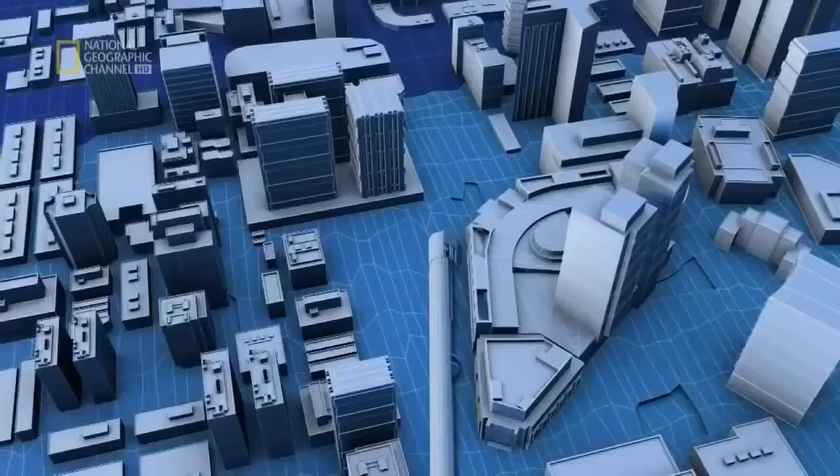TBM 774 is now approaching the zone where the underground geology changes from the karstic limestone to the Kenny Hill Formation, from Swiss cheese to Edam. We are going through a very distinct change in ground conditions. In normal cases, you will need to use 2 different types of machines, and you will need to have another launch shaft to do this. It will take months. But the new variable density TBMs can be retooled underground.

It's a matter of changing the way waste is extracted. Instead of extracting through pipes, it needs to be removed with a system of conveyor belts right to the end of the gantries onto these so-called muck cars.

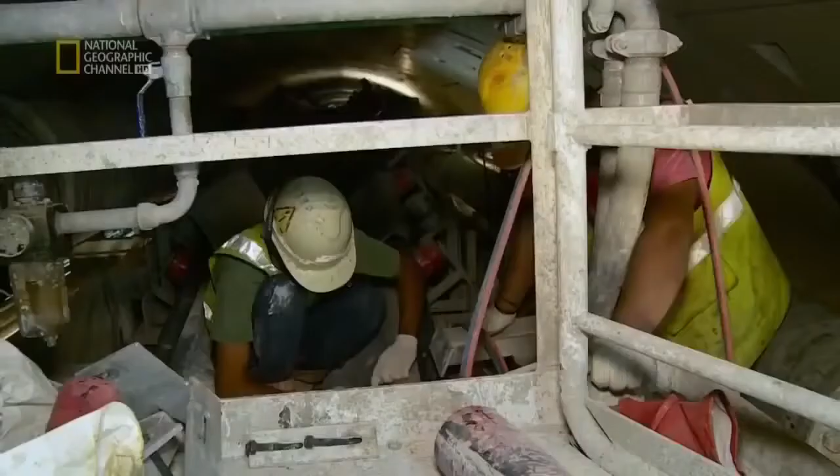The conversion takes 1 week to complete, but it's a much smoother process than the older system.

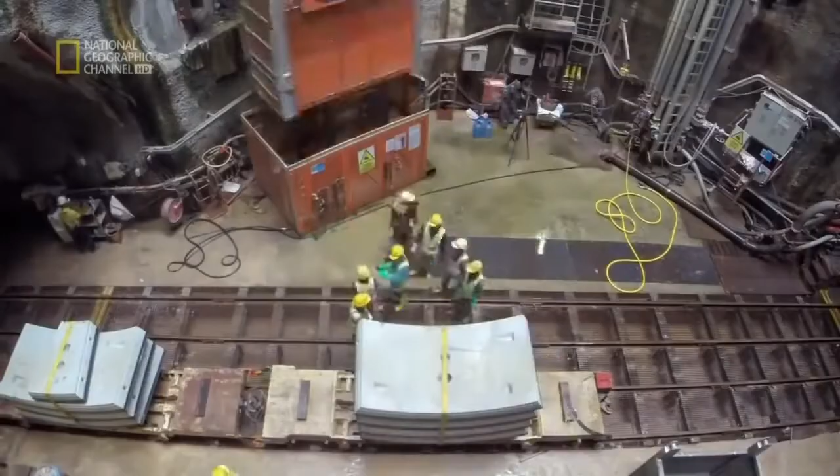But a much bigger hurdle awaits the TBM 774, an underground tangle of steel wires that could bring the TBM to a standstill. 30 meters beneath Kuala Lumpur's nightlife hotspot, Bukit Bintang, engineers excavating the underground section of the city's new MRT encounter an unexpected obstacle.

Contractors of a shopping mall adjoining the street have left steel wires known as ground anchors in place, and these are bang in the path of the TBM. Put into the ground as temporary supports for the basements, they could hold up work for months.

It's very difficult to find them from the surface, and you cannot remove them from the basement anymore because the permanent walls are built. They are all covered.

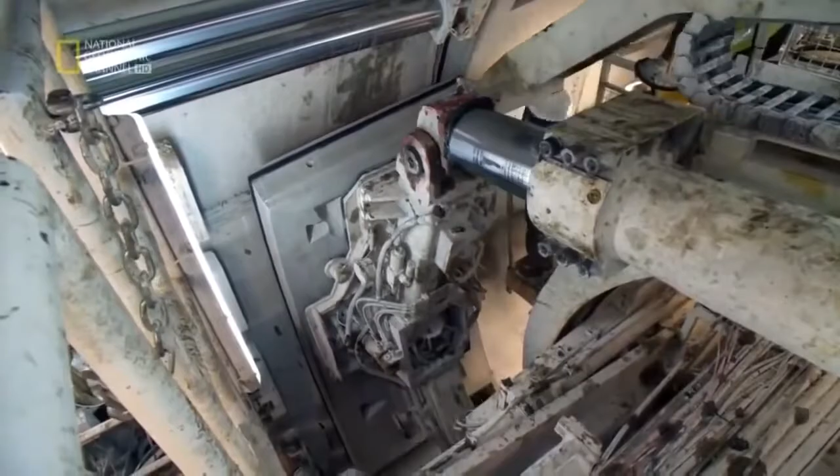Since the steel wires cannot be extracted, a decision is made to push on through with the TBM. But there is a continuous risk that the drill head may become entangled and damaged in the wires.

It is the task of engineer Hugh Wei Hon to monitor the tunnel ahead. So in the morning, actually, we found some ground anchors dropped underneath the conveyor belt, and we decided to stop the TBM, look for the ground anchors, cut it, and remove it.

A team now has to enter the space around the cutter head at the front of the TBM. There's little space to maneuver, and temperatures are close to 40 degrees Celsius.

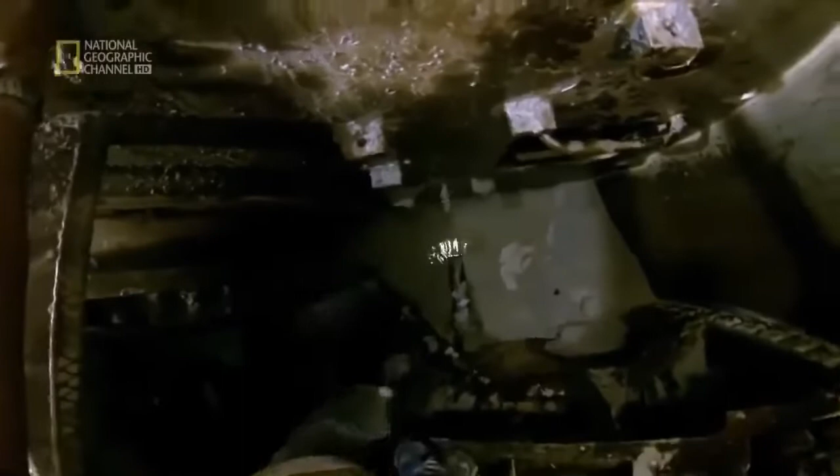To overcome this tangle, first the team washes away earth from the cutter, exposing the snarl of steel wires caught in the cutter head. These must be cut away with an oxyacetylene torch. It's a laborious process.

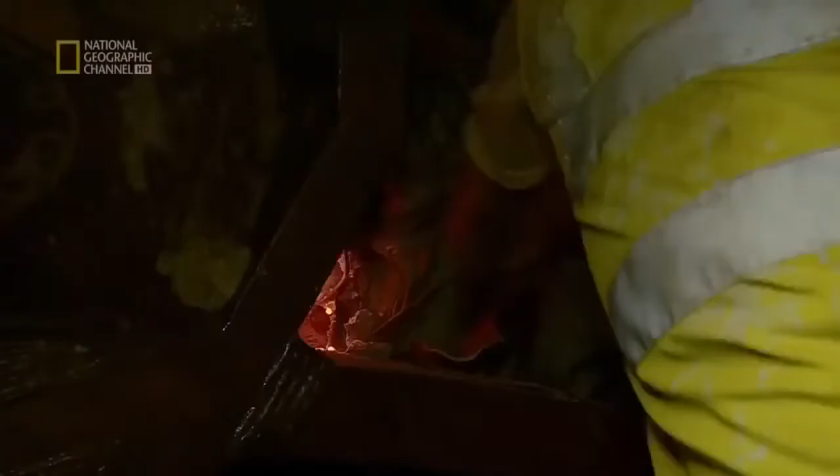Every time they hit the ground anchors, the TBM halts as the wires are trimmed away. It takes 2 weeks to mine through this web, but it could have been worse.

If we had hit all the ground anchors that we expected, it would have delayed the project by about 3 to 4 months. And we were able to go down and cut these ropes so that they weren't stopping the cutter head from turning, and we carried on.

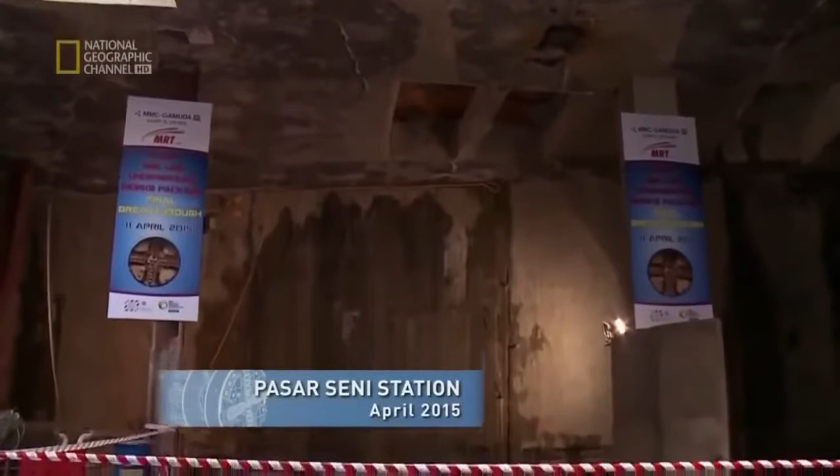It's the final breakthrough. After 23 months of excavation, from tomorrow, the TBM will fall silent.

The honor goes to TBM 774. This was the first TBM to be launched into the limestone labyrinth under Kuala Lumpur. It has burrowed its way through almost 5 torturous kilometers of rock and soil. Now it must make the final breakthrough.

It's a thrilling day for the engineers inside the giant machine. We are about to break through. We have about 400 millimeters left on the cut. Hopefully we'll get a successful breakthrough.

What's happening now is we're cutting the D-wall, so that's basically the barrier between us and open air. So this is a very exciting moment for us. Any moment now, maybe within the next half an hour, we'll be out in the station.

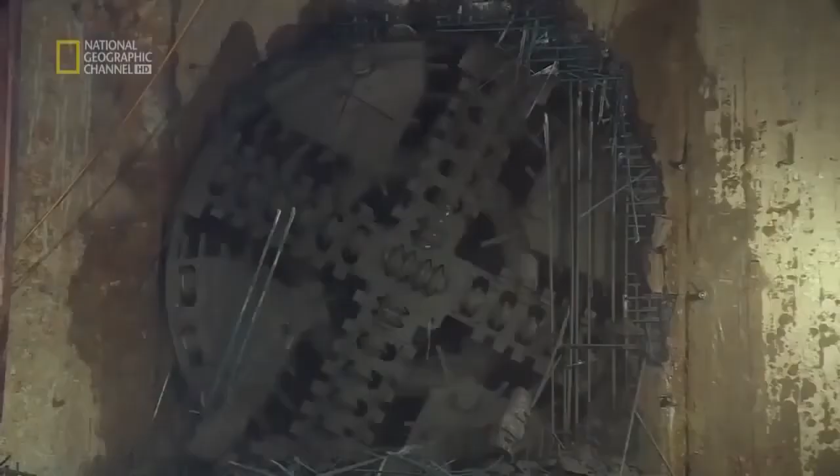This is actually the first TBM that we launched back in 2013. Less than 2 years, just short of 2 years, we have done 20 kilometers of tunneling. This is a great day for me and for the whole team.

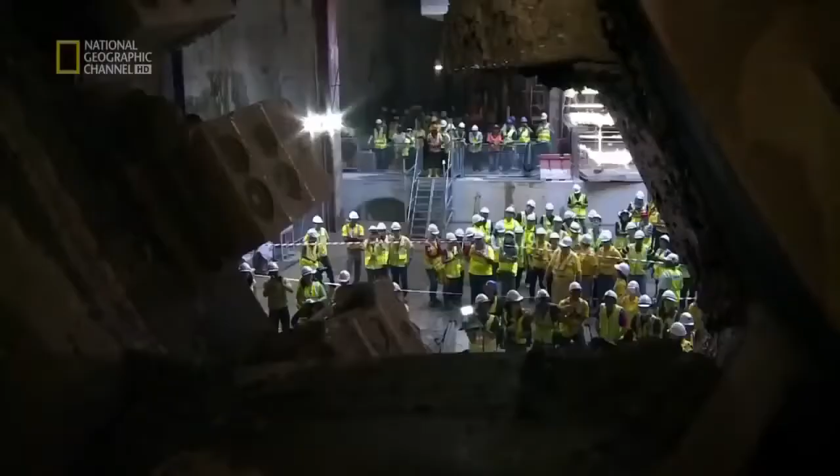Just weeks ago, MMC Gamuda won the Technical Innovation of the Year award for the variable density TBM in the United Kingdom. It's the biggest development in TBM technology in the last 25-30 years. So we have witnessed something new in this business. These are the most versatile machines existent at the moment. This is the future.

The last breakthrough is a landmark moment. Now the race is on to complete the stations and get the MRT running. Only then can Kuala Lumpur's clogged up traffic arteries become truly open for business.

You're basically going to live in a modern metropolis of the 21st century. This is the new world that people of Greater Kuala Lumpur can look forward to. A city seamlessly integrated by overground and underground MRT lines, linking together the city's heart and its far-flung suburbs, where today's gridlock is a distant memory.